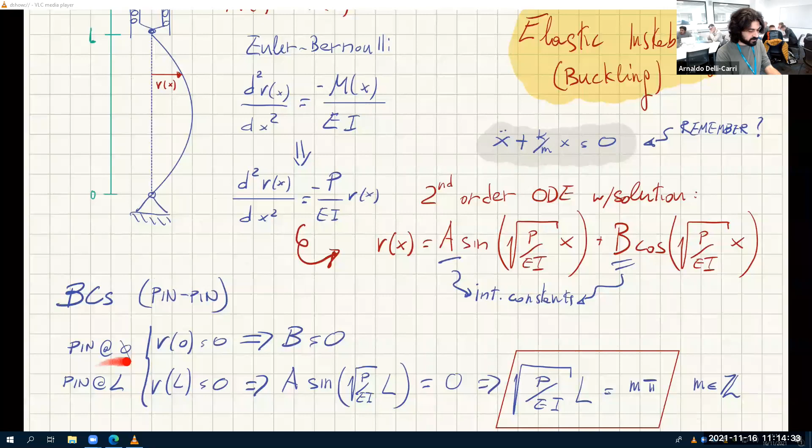Okay. So boundary conditions for this particular case, where it's pinned on this side and pinned on this side: we have v of 0. So what is v? This is v of x. I used an x-axis that goes from 0 to L. So v of 0 is 0, and v of L is 0. You agree with me? It looks like everything is 0 here and here. So v of 0 is 0 means that sine of 0, this goes away. Cosine of 0 is 1, so B equals 0. That's easy, very easy.

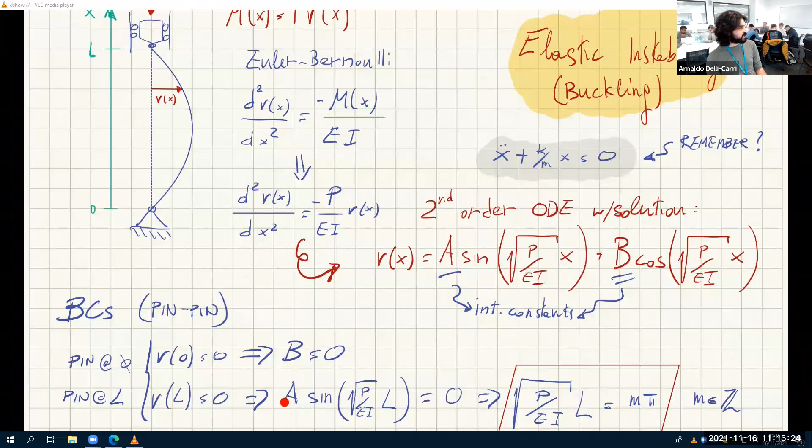And v of L is 0. Let's substitute L here. So v of L is A sine of square root of P over EI times L plus B cosine, but B was 0, so we don't care about this. So A sine of square root of P over EI times L equals 0. Now this is 0 in two cases. A is 0, but if A is 0, then we are saying that v of x is 0. So there is no buckling. So the trivial case is A equals 0.

So let's put ourselves in the non-trivial case. So this sine must be 0. When is the sine 0? The sine is 0 when the argument of the sine is m pi, where m is a relative number, which is an integer, which can be positive or negative. So 0, 1, 2, 3, 4, 5, or minus 1, minus 2, minus 3, minus 4, minus 5. Okay? So this is the solution.

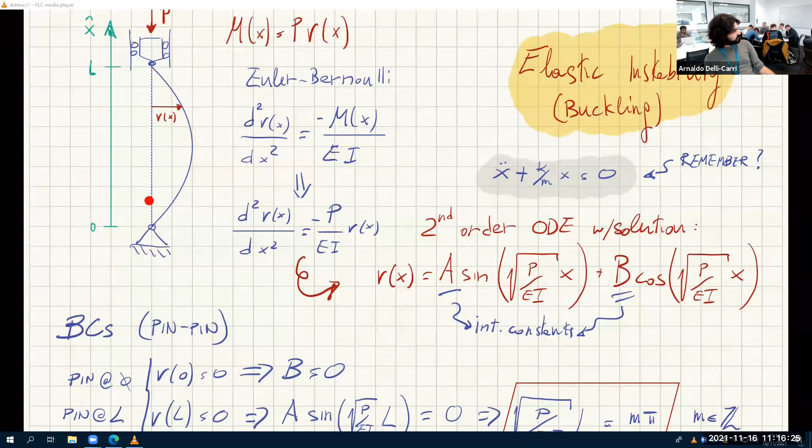And so that means that P, which is our load, is now a function of E, I, L, m, pi. In fact, I can rearrange this to find what is the load that causes this shape. Agreed? And so P is m squared pi squared EI over L squared. So you just rearrange this to find P, and this is called the critical buckling load or Euler load. That's why you have the subscript E, because it's Euler.

Everything is Euler anyway, because Euler is the Chuck Norris of mathematics, really.

So what happens if you change m? See, I told you that this works for every m. Okay, so this works for m equals 0, 1, 2, 3, 4. Well, for m equals 0, you have no buckling again. If m equals 0, you have no load, and so that doesn't make any sense. It's again a trivial thing. If you have m equals 1, you're looking at the basic mode shape. For m equals 2, you're looking at the second shape. And then you have the third shape and the fourth shape. So you have many, many shapes.

But see what happens. If m equals 1, you have just this. If m equals 2, you have 4 times what m equals 1 was. So that means that you have some loads for which you can have these shapes. Now, of course, the smallest of them is already a failure. So we don't care about the higher ones. Because if you reach the lowest one, where m equals 1, that automatically gives you the first failure mode, and that means it's already failed. So if you reach this load with m equals 1, it doesn't matter if you go higher, because it's already failed.

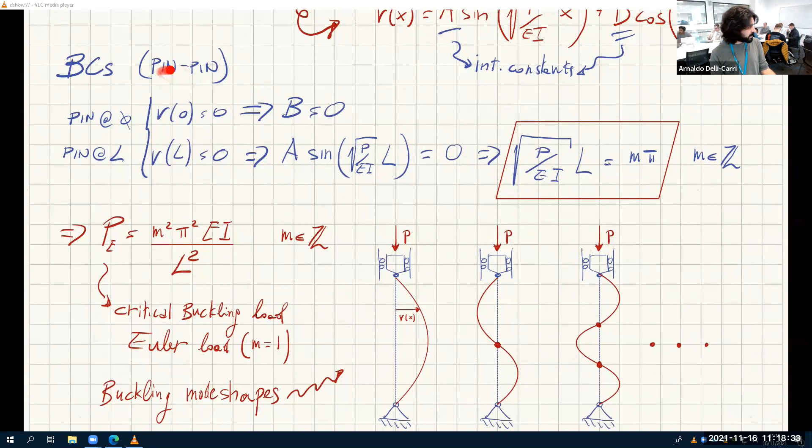Okay, now let's have a look at different boundary conditions, because this thing only works for pin-pin, which is what we did so far. So I found this one from this, which comes from this. So what happens if I have different boundary conditions? I have fix-free, pin-pin, fix-pin, or fix-fix. What happens in these cases?

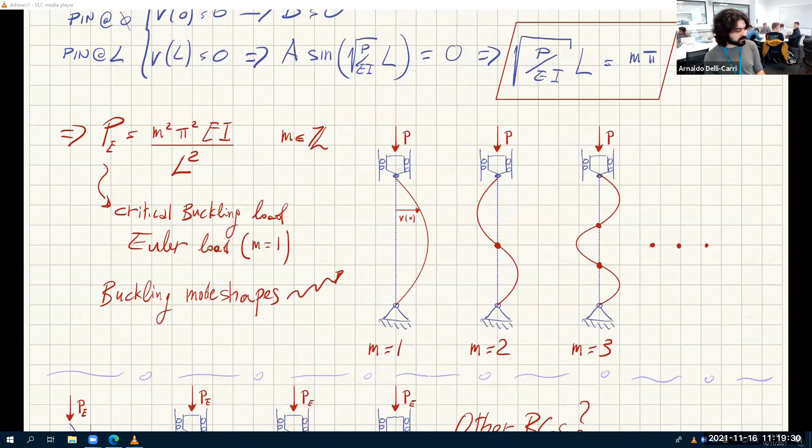Well, you have to solve the differential equation again with different boundary conditions, or since we solved it for you already, you don't have to reinvent the wheel all over again. These were already solved. And so we have added a coefficient n, as opposed to m squared. M squared is the mode shape. So we take m equals 1, because that's what we are interested in. So m disappears, basically. And you have n here.

N tells you what is the boundary condition. So for fix-free, n is 1/4. For pin-pin, n equals 1, which is exactly what we did. For fix-pin, n equals 2, and for fix-fix, n equals 4.

So as you can see, the more you are constraining this, the higher is the critical failure load. So if you want to avoid buckling, over-constrain, basically. If you over-constrain with respect to a pin-pin, if you use fix-fix, you are making yourself room for 4 times more load to be sustained. Nice.

Now, we have a problem here, because compression means it can fail in 2 ways. It can fail by crushing, that means exceeding the yielding stress, or it can fail by buckling. So how do we make sense of these competing things? How do we know? Well, ideally, you should compare the failure stress for buckling with the failure stress for yielding, and see which one is smaller every time. Is there a better way? Of course there is.

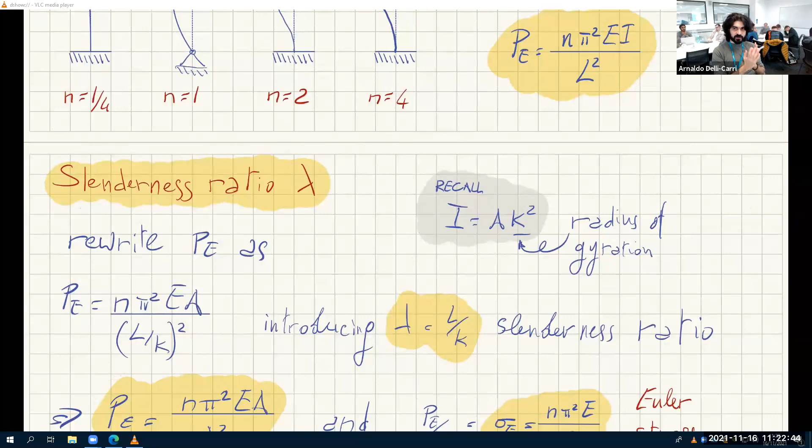So rearranging, the equation looks like this, which is easier, I believe, because this is the geometry of the beam, this is the geometry of the beam, this is the material of the beam, and this is the boundary conditions. And so what is the Euler stress that causes buckling? Well, it's just the Euler load divided by the area. So it's the same thing without A.

Okay, now that we have the compressive stress, which is P over A, and we have the Euler stress, which is this beast here, we can compare what happens for different slenderness ratios. So I plot the stress against the slenderness ratio. First of all, what are the units of the slenderness ratio? It's L over K. Okay?

L over K, what are the units of K? Well, I is meters to the power of 4. A is meter squared. So this K squared must be meter squared as well. So this is meters over meters. And so, in fact, we have no units.

And this is sigma in megapascal. And so you have the crushing line, which is the first mechanism of failure. And you know that it's P over A, and it doesn't depend on the slenderness ratio. P over A, there is no lambda. So that's constant in lambda. Agreed? And of course, it is sigma yield. If you are below sigma yield, you are safe. If you are above sigma yield, you are unsafe. So this is the crushing line.

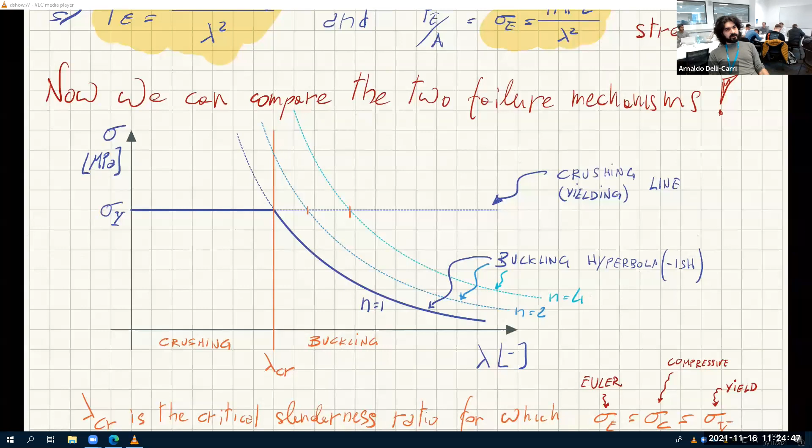Of course, the buckling stress, though, looks like a hyperbola. It's not a hyperbola, because a hyperbola would be lambda without the exponent. This is lambda squared, so it looks like a hyperbola, but it's not. And so you have the buckling hyperbolish curve that looks like this one. So if you plot this one, you get this for n equals 1. If you have n equals 2, you get this. It's the same one, but it's just being translated over. Okay.

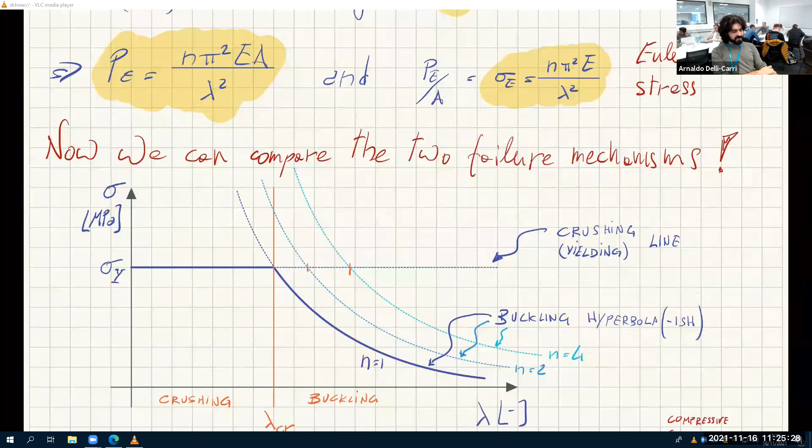And so, as you can see, they meet here. If you are in this region, crushing occurs before buckling. You crush first and then buckle. But if you are in this region, you buckle first and then crush. Okay? Because you're looking at increasing the stress in this direction. So you crush first and then buckle. And if you are here, you buckle first and then crush. All right? So we have identified two regions in this plot.

And so we have the crushing region and the buckling region, and they are separated by something that we call the critical slenderness ratio. It's critical because it separates the crushing failure mechanism from the buckling failure mechanism for the same load. If you have the same load, a more slender beam will buckle first, a less slender beam will crush first. All right? Does it make sense? Good.

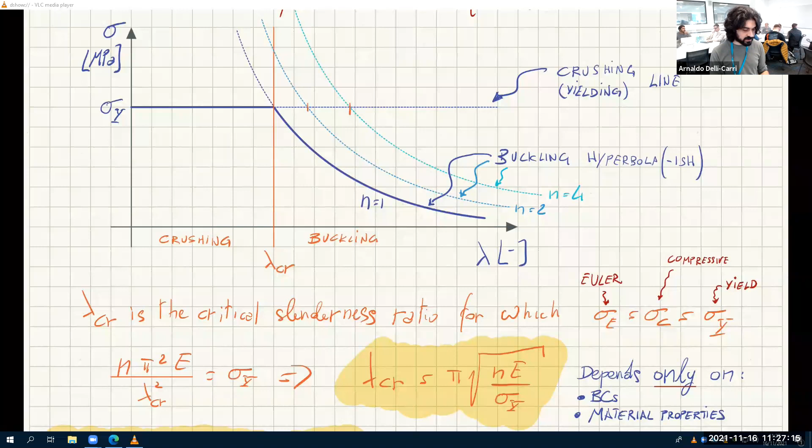Okay, so what is the lambda critical in formula? Well, it's the critical slenderness ratio for which this line and this line must be the same. This one is the Euler stress, sigma E. This one is the compressive stress, sigma C, which is also equal to sigma yield. So you can just find lambda for which this equation is true. You just rearrange to find lambda and you get this. As you can see, lambda critical depends only on the boundary conditions, this is N, and the material properties, Young's modulus and yield stress.

So the critical slenderness ratio is not a geometric property, although it looks like one. The slenderness ratio is a purely geometric property. But the critical one depends only on the boundary conditions and the material. And that's a bit of magic, which you can do with mathematics. That means that once you know the material and how your beam is constrained, you can already tell, based on your calculated slenderness ratio from your geometry: if it's smaller than lambda critical, it will fail in crushing. If it's larger than lambda critical, it will fail in buckling.

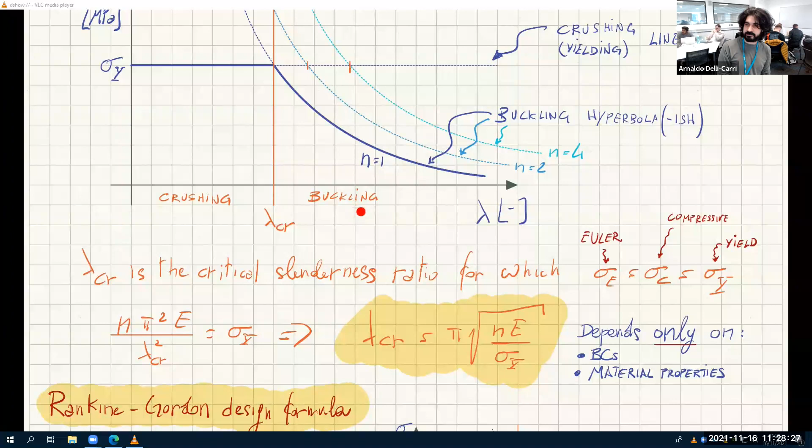The last thing I want to discuss for this revision is, let's look at this. This is a discontinuous curve. Do you agree? Because the derivative on the left-hand side of this point is different from the derivative on the right-hand side. So this is a discontinuous function. And we don't like them because discontinuous functions must be treated in segments. Segment 1, segment 2. So they are continuous in a piecewise way. Piecewise continuous functions, which are discontinuous in nature.

So can we find a continuous function like this? Yeah, of course. It's an approximation, but it works very nicely because it's a continuous function. So we don't have to study it in segments. So is there a function like this? Yes, this one. 1 over sigma failure, which is this red curve, equals 1 over sigma yield plus 1 over sigma E. This is called the Rankine-Gordon design formula.

It's an empirical formula. It's more conservative because it always lies below this line. So it never goes up. So the stress is always more conservative than it should be, which is a good thing for engineers. Okay. For engineers, always go conservative unless you're voting. Okay?

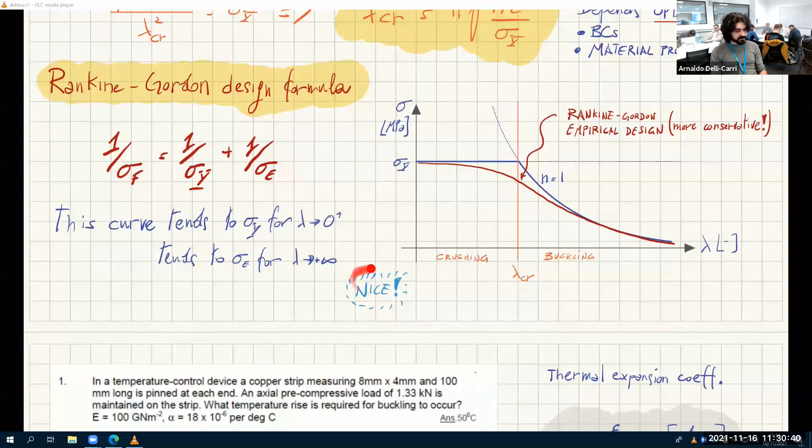All right, so we can now start. First of all, any questions? Any questions on this? It's very important.

I will stop recording for a second. Not stop, I want to pause the recording for a second. Okay, it's very scary. Okay, we are back again.

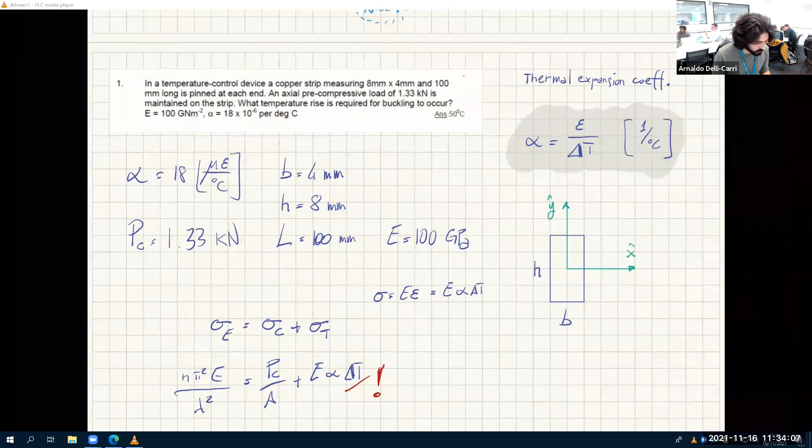So let's solve this one. What's this? Let's solve question 1. Yes. Do you need to continue your recording or are you already recording? Yes, I am recording already. Okay. I also got this very loud announcement in this room.

Okay, so in a temperature control device, a copper strip measuring 8 × 4 millimeters and 100 millimeters long is pinned at each end. An axial pre-compressive load of 1.33 kilonewtons is maintained on the strip. What temperature rise is required for buckling to occur?

Now we are given two material properties. One is the Young's modulus, 100 gigapascals, and one is this alpha. What is this alpha? It says here on top, it's the thermal expansion coefficient. And if you don't know what that is, it has units of something per degree. That something has no units, so it's no units per degree because we're talking about microstrains.

We're talking about strains. So alpha is the strain divided by the delta temperature. It's a material property. Every material has its own thermal expansion coefficient, and it refers to normal strain only. Why? Because if you immerse an object at a certain temperature, it will expand. It will maintain its own shape. It will just expand, get larger.

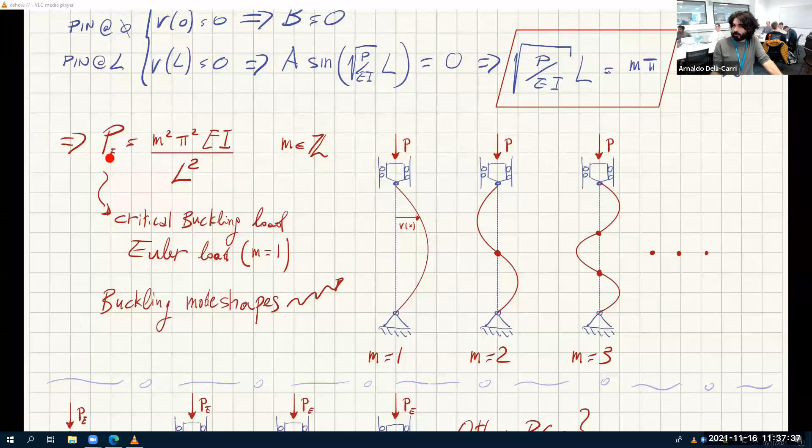And in fact, you reminded me that we didn't talk about one very important thing: when you have I, which I are you using? Since we want the smallest load, you need to use the smallest I. That means the beam will buckle around the smallest I. So in this case, it will not buckle around X, it will buckle around Y. Agreed? Well, it will buckle around X eventually, but it has already failed around Y, so it doesn't matter.

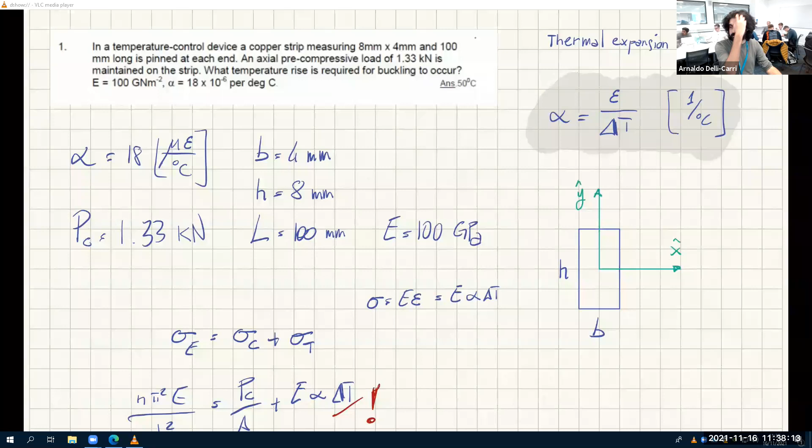Okay, so these are all the geometrical properties. These are the load properties, and these are material properties, alpha and E. Now, this strip looks like this. It's mounted in this way in this temperature controlling device. And you know that there is a load applied already, a compressive load of 1.33 kilonewtons.

What's required is how much more stress it can take before buckling. And that stress is not due to further load, it's due to temperature only. So the Euler buckling load is a combination of compressive stress and temperature stress.

Okay, so this stress is due to the compression, and this stress is due to the temperature. Now let's have a look. Euler load is this. Okay, compressive stress is compressive load over area.

And the temperature one is, well, remember that sigma is E times epsilon. Epsilon is alpha delta T, and so sigma T is E alpha delta T. Okay, very easy. Although you need to stitch all these pieces of information carefully together in order to understand what's going on.

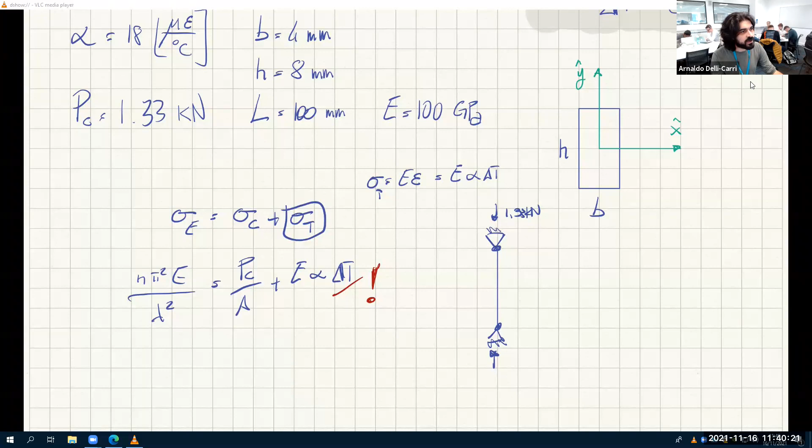Okay, now that we have this, let's have a look at what we know and what we don't know. N is the condition. What is N for this boundary condition? It's pinned at both sides, so it's 1. Let me check the chat... yes, I see Marius, thank you. Yes, this is 1. So N equals 1 in this case because it's pin, pin, pin.

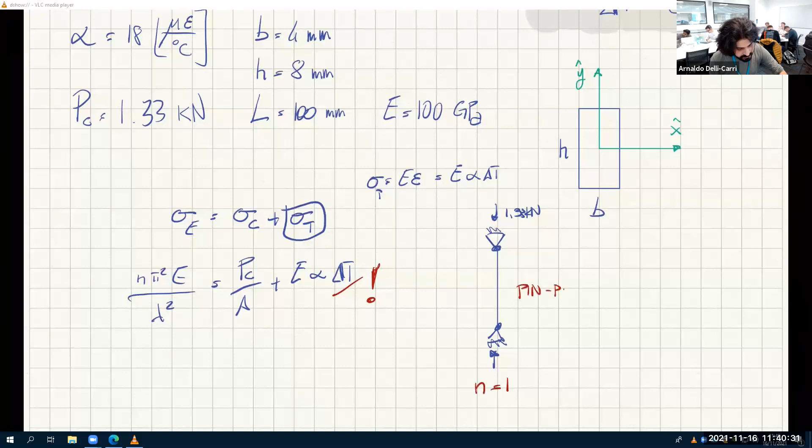So N is given from the boundary condition. Pi is pi. E is given. Lambda, is it given? Well, we have L and we have the cross-sectional information. So remember, lambda is L over K, and K is square root of I over A.

So we know I, we know A, we know L, so we can find it. So I can also say that lambda is just L over square root of I over A. Or even better, lambda squared is L squared A divided by I. You agree?

So L is given, A is given. Well, A we can find and I we can find. So here we know everything. PC we know, 1.33. The area we know. Young's modulus we know. Thermal expansion coefficient we know. The only unknown is delta T. That's it. So how much temperature gradient do you need in order to activate this strip?

Now this is a temperature controlling device, but this is also how some thermal switches work. So if you know that you are in a kettle, like in a kettle, yes, also, sure. So a thermal switch works like this.

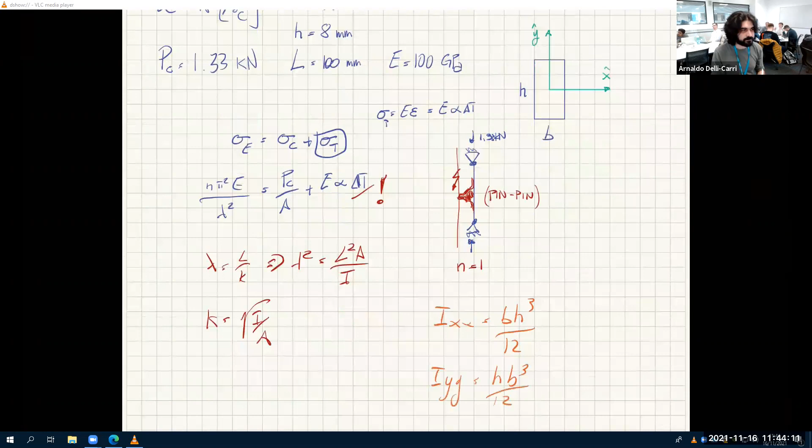Okay, so in this case, IXX, let's check which I we want to use. So IXX is BH cubed over 12, and IYY is HB cubed over 12. Now in this case, you do agree with me that IYY is the one that we should use. Agreed? So in this case, instead of I, I will always say IYY. Every time I find I, I need IYY, which is the smallest of the two, since IYY is smaller than IXX, so this is the one that we want.

Okay, so I will not do the calculations here because boring. Okay, so you do the calculations. I think this exercise is very cool.

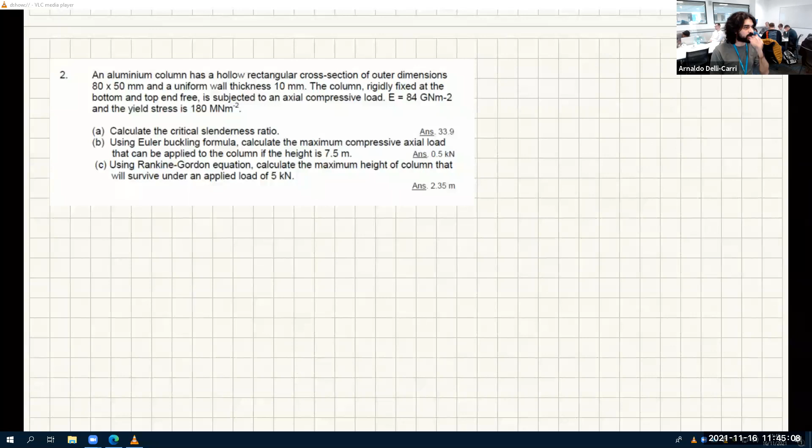Now let's do this other one. An aluminium column has a hollow rectangular cross-section of outer dimensions 80 by 50. So let's draw this one. It's a hollow rectangular, so 80 by 50, something like this.

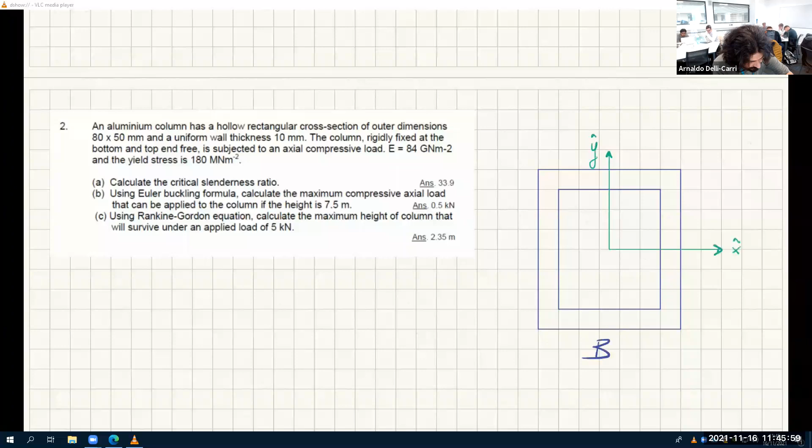Okay. And so let's say that this is the y-axis, and this is the x-axis. Our outer dimensions are these, so let's call this capital B and capital H. And the uniform wall thickness of 10 millimeters, so let's call this one T.

The column is rigidly fixed at the bottom and top end free... the column rigidly fixed at the bottom and top end free is subjected to an axial compressive load. So we have a condition that looks like this.

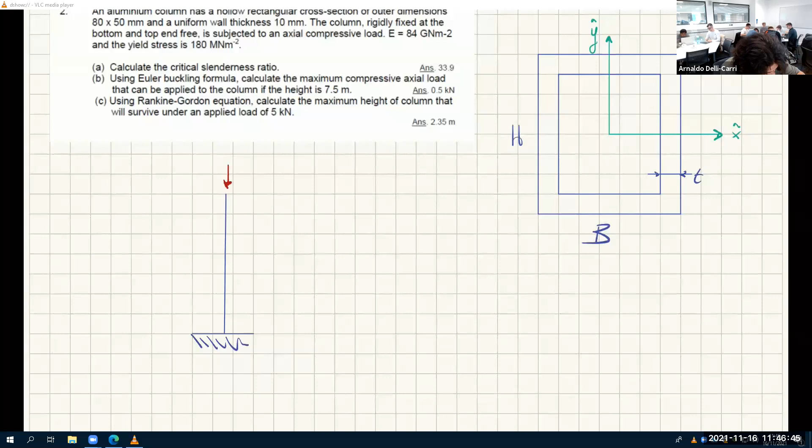It doesn't say how much, but we know that the material properties are 84 gigapascal for Young's modulus and yield stress of 180 megapascals.

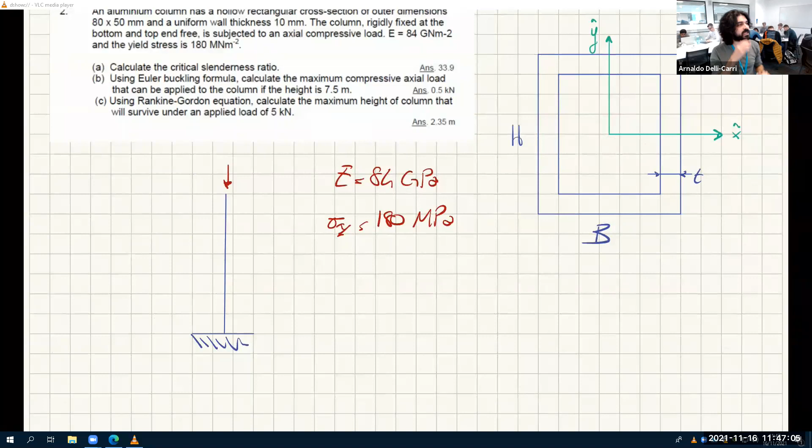Calculate the critical slenderness ratio. First of all, what is N for this? It's 1/4. Come on guys, 4 is for fix, this is fix-free, so this is the least constrained one. This is very susceptible to buckling. So N is 1/4 for the fix-free boundary condition.

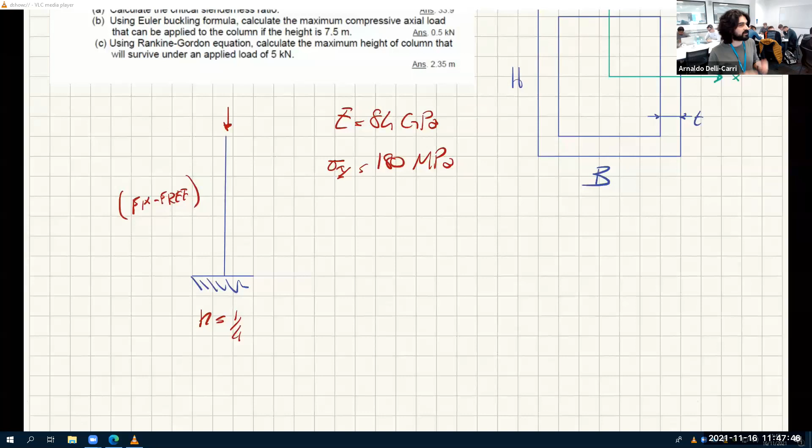And what is the critical slenderness ratio? Do we need anything? We don't need anything. We need to know the material properties, N, and the boundary conditions. Let's take this one here. That's what we need.

There you go. Bam. How much is this? I believe this one is 33.9. Just make sure that you use the correct units. E is in gigapascal, so you want to be using megapascal. So it's N, 1/4, times 84,000 divided by 180, under square root, times pi. This should give you 33.9.

What are the units of this? No units, because it's megapascal over megapascal. That's it.

Using the Euler buckling formula, calculate the maximum compressive axial load that can be applied to the column if the height of the column is 7.5 meters. Now the height of the column is the length of the beam, basically.

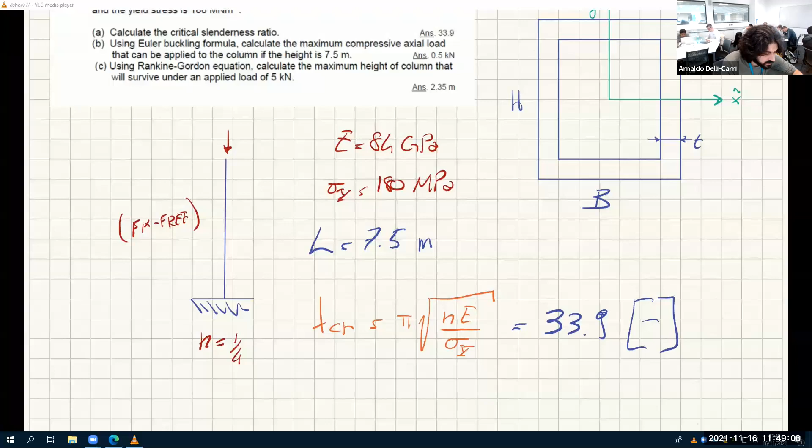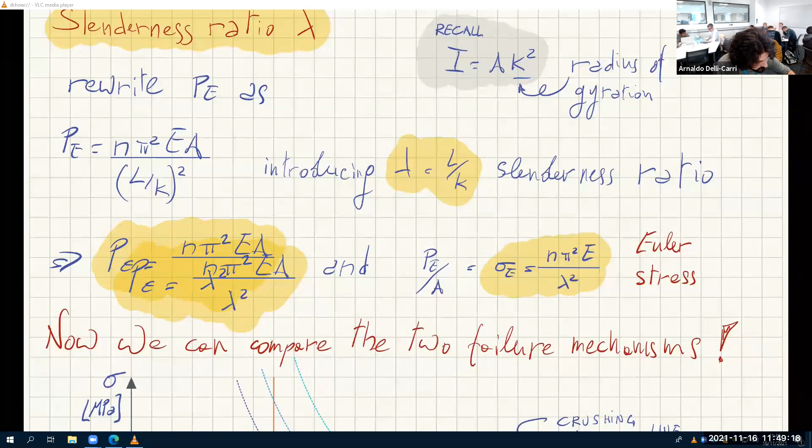I'll just copy and paste the formula for the critical load, so this is Euler load. This is part A. This is part B. So we first have to calculate the slenderness ratio. Now the critical one is this, and now we calculate the actual one to see if it's greater or smaller than the critical one. If it's greater, it will fail in buckling. If it's smaller, it will fail in crushing.

So lambda equals L over K. L is given and K is not given, so let's find K first. K is the square root of I over A. Therefore let's find I. Which one is the smallest I in this case? Again it looks like it's around Y, so it's I-Y-Y, the smallest one.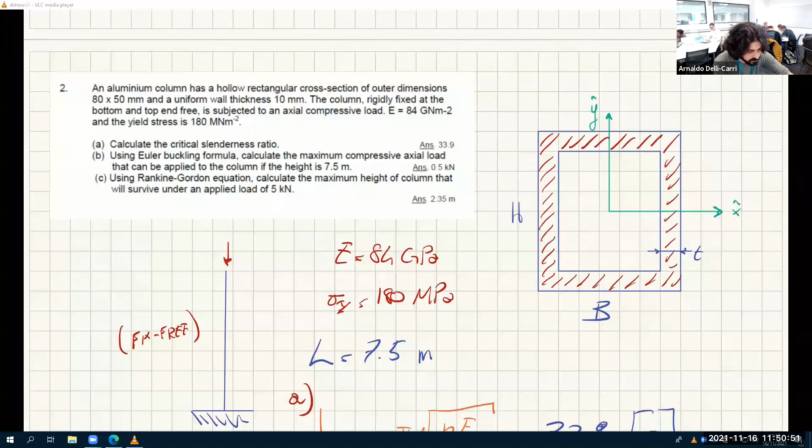How much is that? Remember, the area that we want is this. And so we want I-YY is HB cubed divided by 12 minus, so it's the larger square minus the smaller square.

So the larger square is HB cubed divided by 12, where B is 50, and H is 80, and T is 10. So you know that the small b here, so small b and small h. Small b is capital B minus 2t, and small h is capital H minus 2t.

So this minus small b, small h, small b cubed divided by 12. Agreed? And so can you do this calculation for me, please? Where this is just HB cubed divided by 12 minus H minus 2t times B minus 2t cubed divided by 12.

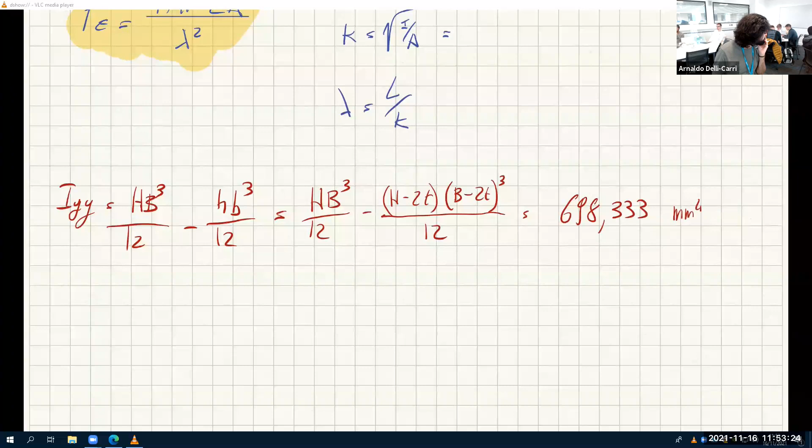Let me check the chat. Asia says 698,333. So let's say 698,333.3. Well, it's already millimeters to the power of 4, so let's take it like this, approximately just 698,333.

How do you go from HB over 12 minus HB over 12? Because I'm looking at these. So this small b is capital B minus t minus t. And also small h is capital H minus t minus t.

Okay, we have this, and can you tell me how much is K then? So the area of this is also, so the area is HB, sorry, capital B times H minus small b times small h. So can you tell me how much is the area in millimeters squared?

Come on, who's faster? Guys, this is easier than the last one. 2200. 2200. Thank you. Millimeter squared.

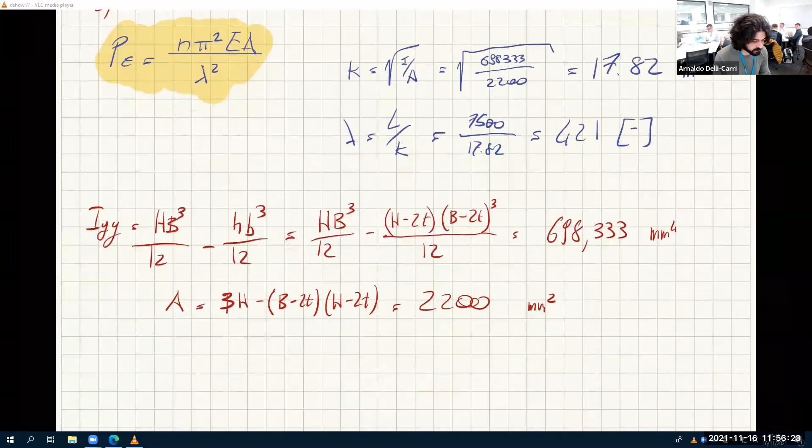How much is P? It should be 0.5 kilonewtons, or 500 newtons. As you can see, only 500 newtons, which is about 50 kilograms. So P is n pi squared EA over lambda squared, which is 500 newtons.

And why is it only 500 newtons? Because the slenderness ratio is unbelievably high. It's too slender. It's 421 times longer than it is thick. That's the idea. So this might be spaghetti, a 7.5 meter long spaghetti.

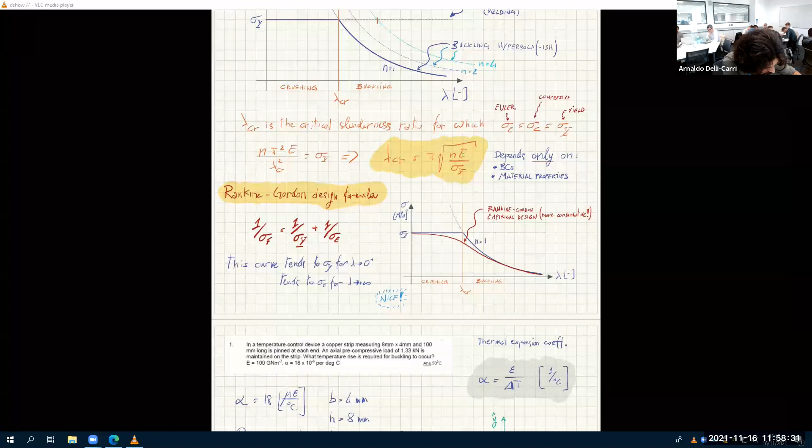Then we have sigma F, which is the failure stress, and an applied load of 5 kilonewton. So sigma failure equals 1 over P over A. This is sigma yield, and this is 1 over sigma E. Sigma E, let me find it here, is very easy, it's this one.

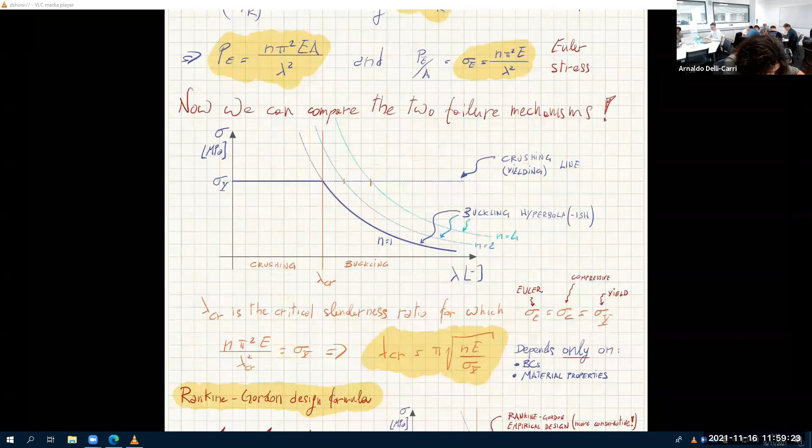So this is n pi squared E divided by L divided by K squared. The only unknown in this equation, as you can see, is L, because this is the new load, 5,000 newtons. This is the area that we know, and this we know too. It's the same cross section, so K is also the same.

What's the new length so that it doesn't fail? So that we are on the brink of failure, really. Under that length it will not fail, above that length it will fail. Any questions on this? As you can see, it's very easy.

How is P 500? Actually, for lambda I use this one. I used 421. And remember, you have to use the correct units. So if you use E in gigapascal, A in millimeter squared, you should get a result in kilonewtons, so you should get 0.5.

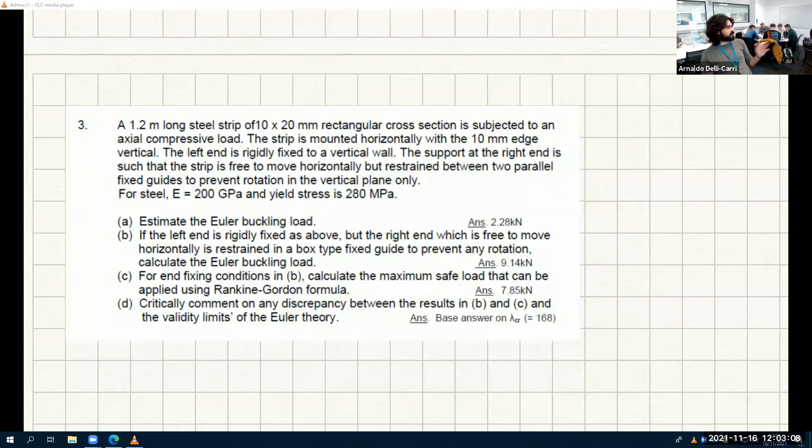So estimate the Euler buckling load. The Euler buckling load is the smallest load for which it fails. Depending on which plane you look at, XX or YY, with different boundary conditions, you take the smallest load, and that's the Euler buckling load.

Then it says, if we release one of the constraints, what's the new Euler buckling load? Of course it becomes higher. Oh no, wait, we are over-constraining this, so we are not releasing the constraint, we are adding a new constraint. Of course the Euler buckling load goes higher, and it's 4 times as high, as you can see. Very easy.

For the end fixing condition in B, what's the maximum safe load that can be applied using the Rankine-Gordon formula? So again, this is exactly the same thing, you just have a different unknown. And now critically comment on any discrepancy between the results in B and C and the validity limits of the Euler theory. Okay, so all this information you find in the lecture slides.

Any questions? No? I think this exam question is quite fun as well. It's not too hard. It requires some initial thinking about understanding the boundary conditions and about understanding what is the smallest second moment of area that you have to use. It might be that XX and YY are on different boundary conditions, so keep your eyes out for this. And that's it. Everything else is just literally very easy.

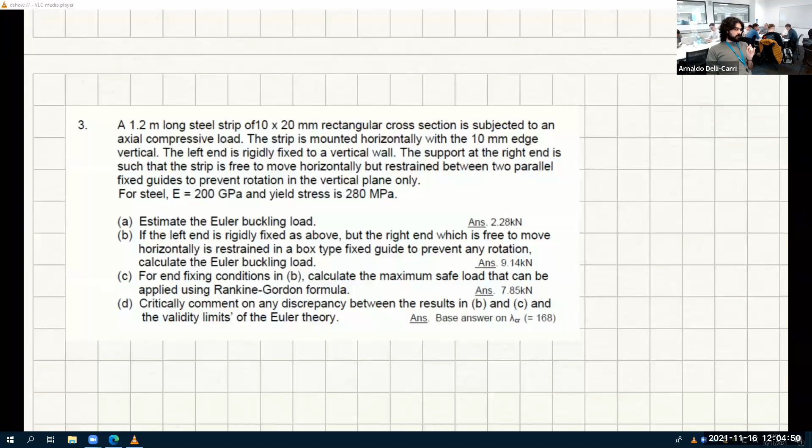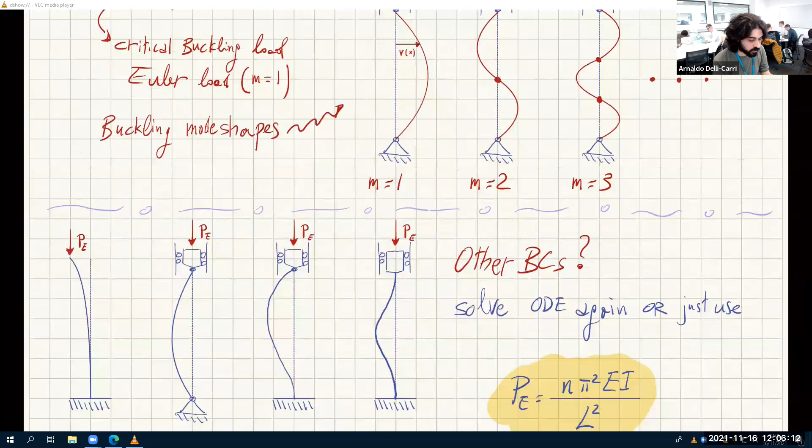Now I'm not sure why you got a different answer, or probably I didn't do this calculation, so probably this is wrong. Guys, can you please recheck this calculation for me? Because this is seemingly not correct. If we get all of these, this is not 0.5 newtons, I'm so sorry, 0.5 kilonewtons. But apparently the solutions got the same answer as here is getting. So I don't know. Okay, yeah, I got the 2572.

Okay, so you also got 2572.6. So let's use yours. So 2572.6, which is the same as the solutions apparently, but not the same as this answer here. Who knows?

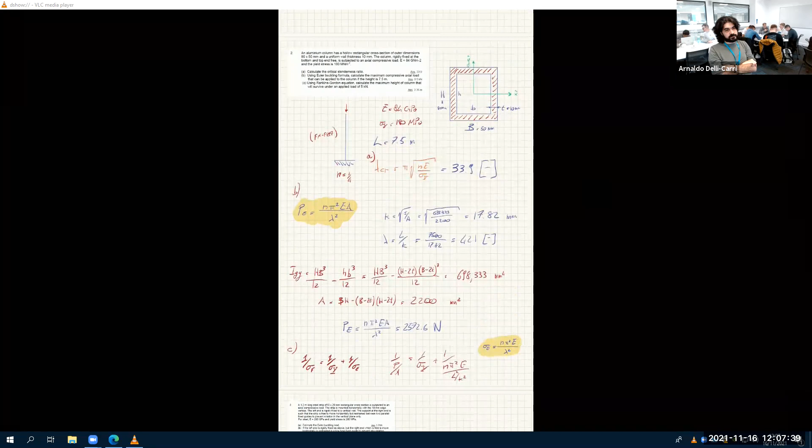So one very overlooked source of error for strain gauges is how you glue them. If you glue them slightly off axis, you are measuring a different strain. So it depends on the angle you're gluing it on. So you must be spot on to measure this line of stress rather than this. Okay.

Also, did you write about the Wheatstone bridge? No, why would I write about it? Because it's very important, because that's how you are measuring the strain. So you're not measuring the strain, you're measuring a resistance. Yeah. So how do you measure resistance? With a Wheatstone bridge? Length. No, it's not just length. That's how you calculate resistance. You are measuring resistance. It's a different thing.

If you glue it in this direction, it will measure the strain in this direction. So if you glue it a bit off axis like this, you're not measuring this, you're measuring this. And so you're measuring a different thing than you want. So there's a source of error.

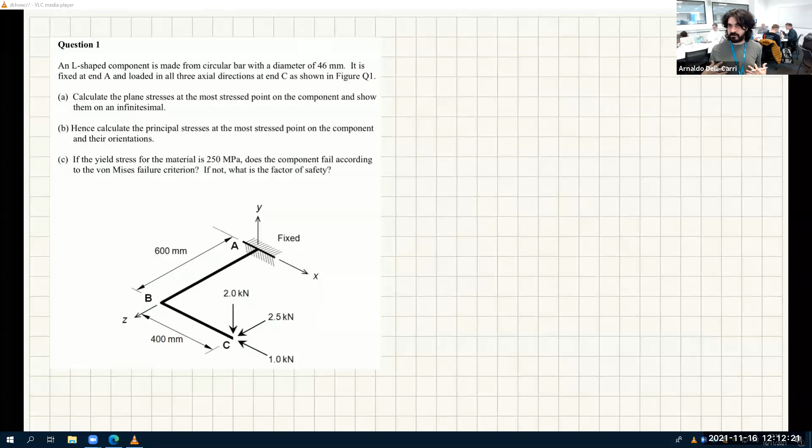Okay, I think it's time we resume. It's 5 minutes already. All right, so do you want me to solve anything in particular? First, this is revision, so it's kind of open-ended, open questions. So do you want me to solve anything in particular, or do you want to go? Yes. Yes.

The question, can you do it the IJK way? What is the IJK way? Cross product. Oh, okay, sure. Yeah, we can do that. Yeah, that's how you should do it. It's just vector products. So do you know about IJK? I think you do, because you're asking me about it. So you have I, J, K. You know about this, do you?

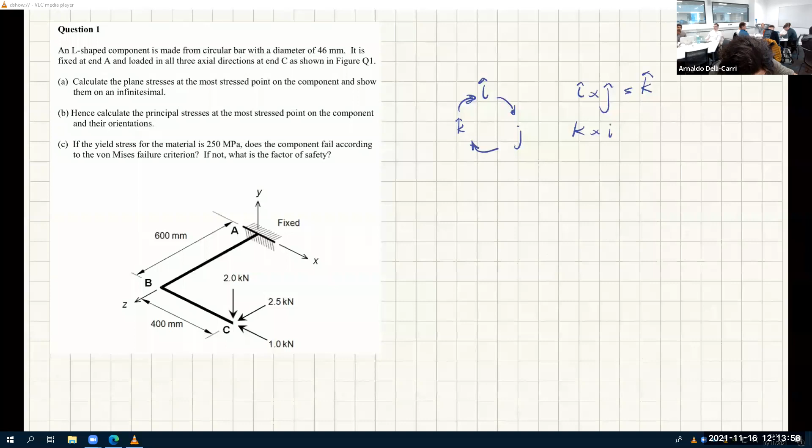And so if you have I cross J, you get K. I cross J gives you K. K cross I gives you J. And J cross K gives you I. Now, of course, cross product also means that if you invert these, you have the opposite of it. So K times J gives minus I, I times K gives minus J, and J times I gives minus K.

So we also have that the moment is, remember, force times perpendicular distance, but the vector moment is also the distance cross product with the force. Okay, good. How does this compare to force times perpendicular distance? Do you know about that? So let's say this is O, the pole of reduction of the moment. Let's say the moment about O. And so this force is applied, say, here at point P, and it's in this direction.

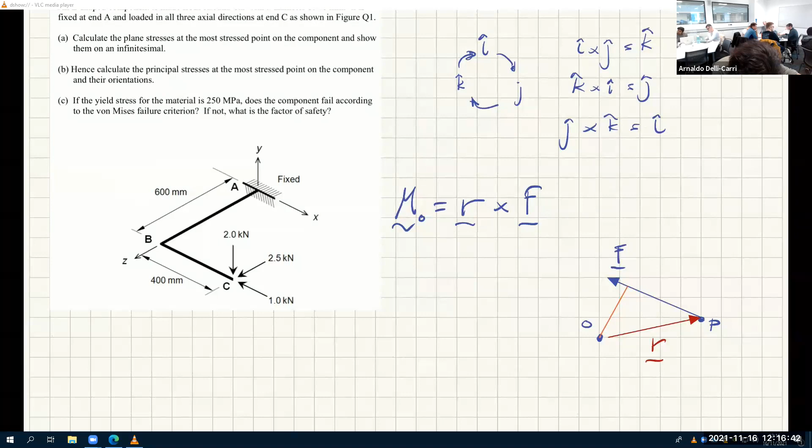Okay. Now, if I do this, this is my force, and this is my R. Now, as you can see, it doesn't look like we are doing force times perpendicular distance here, because this is not perpendicular. So the perpendicular distance is this. You agree? Come on. There you go.

And so let's check what this means. Remember, the magnitude of this vector, M, is the magnitude of the first vector times the magnitude of the second vector times the sine between the two. Agreed? And now, if you look at this, you tell me what is r sine theta. This is the hypotenuse of this triangle. Agreed? And so r sine theta is this edge, and this edge is the perpendicular distance. There you go.

So I can say that MO is F times D. So this is the other way you do the moment. So either moment is force times perpendicular distance, or the vector product of the distance from the pole of reduction to the point of application of the force, R, times the vector force itself. Very good.

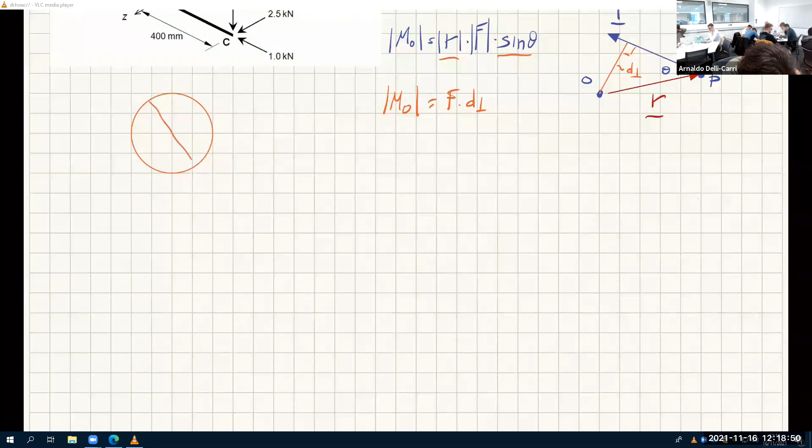And this is the center. It's fixed at end A and loaded in all three axial directions at end C, as shown in figure Q1. Calculate the plane stress at the most stressed point on the component and show them on an infinitesimal. Calculate the principal stresses. If the yield stress is this much, does the component fail according to the von Mises failure criterion? And if not, what is the factor of safety?

Very good. So it just comprises everything that we did in that week, basically. So how do you do this? Remember, you always first have to find the bending moment diagram. And I believe that it's very complicated here because you have three forces. But you also know that the most stressed section will be here, because that's where the fixed support is.

And so you can just take all the force components. These are all the internal loads. And then you have a force along X, a force along Y, and a force along Z, a moment around X, a moment around Y, and a moment around Z. Some of these will be normal force, some of these will be shear forces, some of these will be bending moments, one of these will be twisting moment. We just have to check the axis.

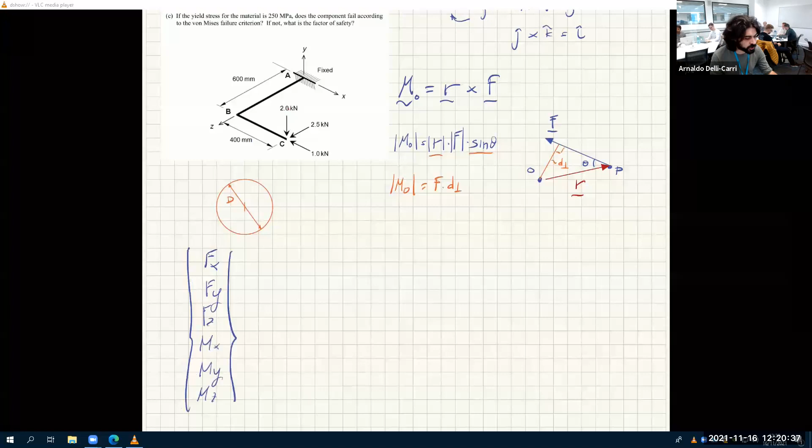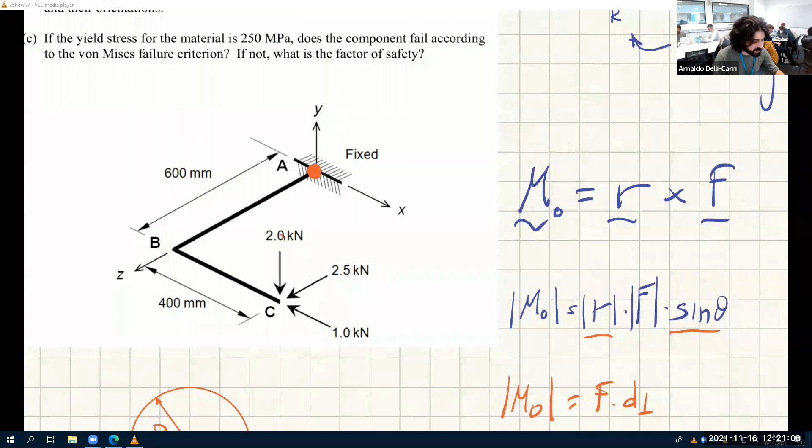So now the section that we want is this one. And so which axis is normal to this section? Yes, Z. Okay, so the axis that is normal to that section is Z. So if I draw the axis here, I see that the x-axis goes in this direction, and the y-axis goes in this direction. Very good.

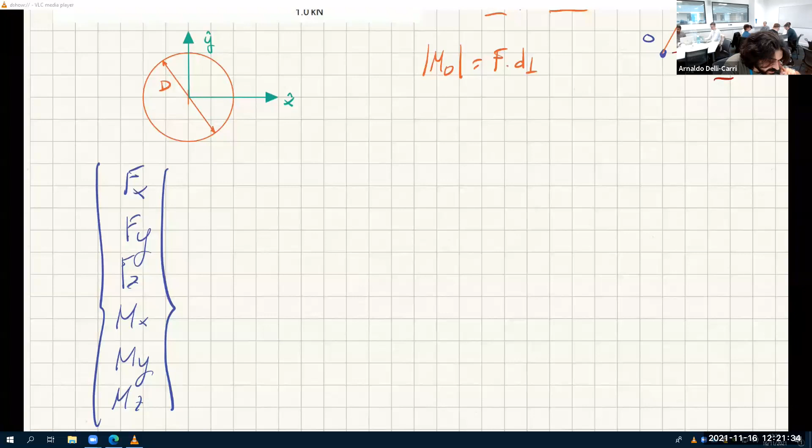Now, question. Let's find the moment. Now, the moment of these three forces about this point, let's call this point A, so M of A. I want to find the sum of moments about A of these forces. Now, let's do this in the IJK way. So this is R1 times F1 plus R2 times F2 plus R3 times F3. You agree with me? Okay.

So how much is R1? Well, you should agree with me that R1, R2, and R3 are exactly the same. R is this. This vector here is R, which is the distance from the point of application of the force, and in this case all three forces are applied at the same point. So R1, R2, R3 are just R. R equals R1 equals R2 equals R3. And then I'll say that this is force 1, this is force 2, and this is force 3. They are all applied at the same point, but they have different directions. So how much is R in vector form?

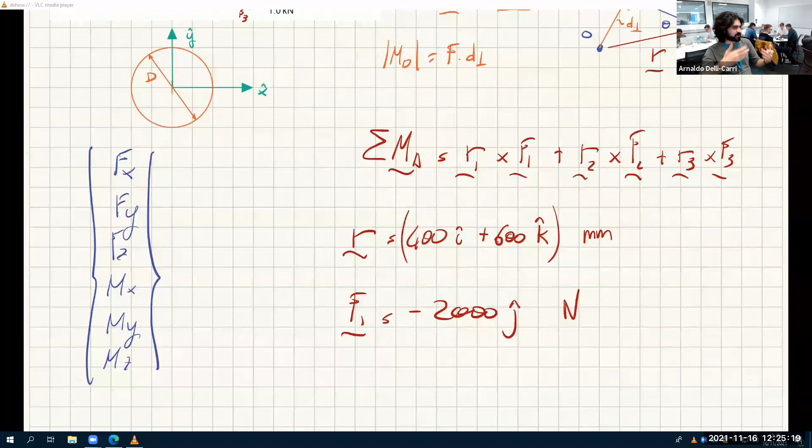Yes, J is for the Y. I, J, K, X, Y, Z. Yes, so you put still the wrong thing, because the Y is 0. The 600. Oh, you're right. For R, yes. So 600 is Z. Thank you. So this is K. So we have no J in this case because it is on the plane XZ. So F1 is minus 2000j.

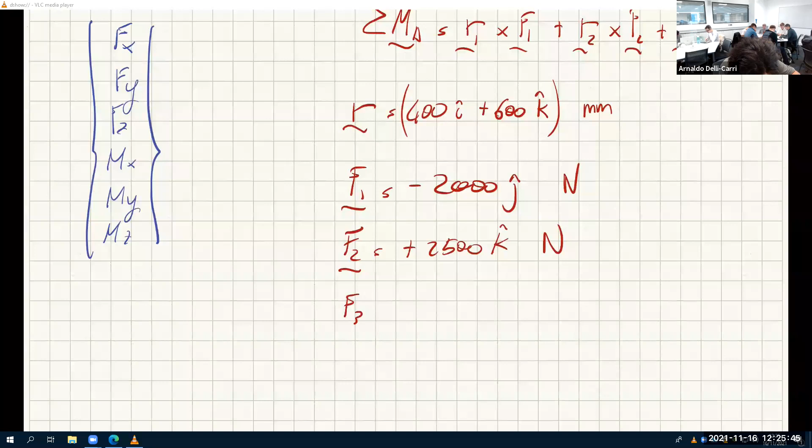F2 is plus 2500k newtons. F3 is minus 1000i newtons. Do you agree with me? Now that we have all this information, we can solve this one. So let's do this one by one. So this is 400i plus 600k cross product minus 2000j, plus this one again, and this one again.

This one is minus 2000 J, this one is plus 2500 K, and this is minus 1000 I. And now how you do this, it's just multiplication. Remember these, and you add usual multiplication things. So you have 400 times 2000, it's 800,000. Is it 800,000? So minus 800,000.

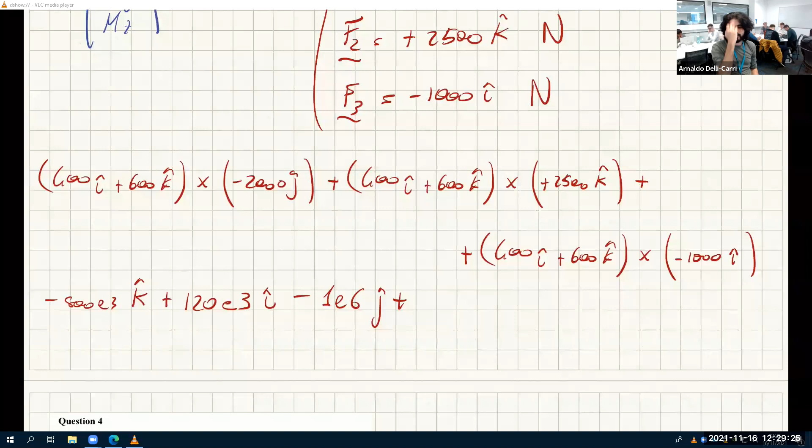Plus 600 K times K. What happens if you have K times K? Nothing. I mean 0. Why? Because K and K are parallel to each other. So the angle between the two is 0. So the sine of 0 is 0. Done. So K and K, you have this nice 0 here. I'll write it down to remind you that nothing happened between this and this.

Plus, this is also 0 because it's I and I. And then you have K and I, plus. K and I is J. Yes, K and I is J. So 600 is minus, so this is minus 600,000 J. So 1 million minus 600,000, sorry, minus 1 point, this is 1.6e6.

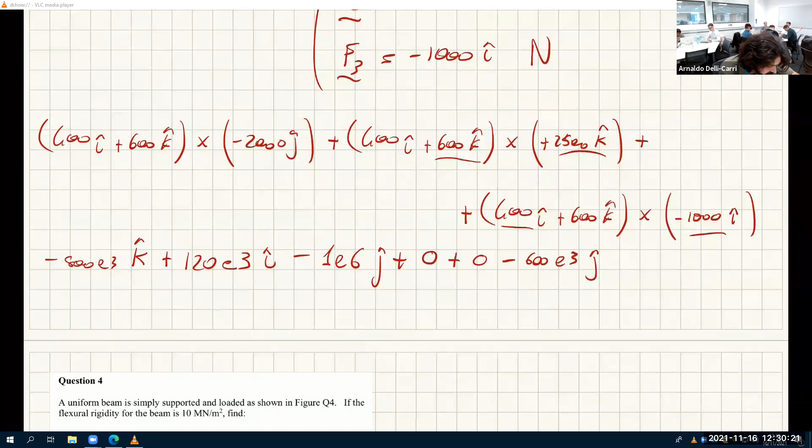Okay, so finally, M of A, the sum of moments on A, the vector description of this is 120,000 I minus 1,600,000 J, and minus 800,000 K. I don't know if this is easier or harder, but it's automatic. So the good thing about this is that you can program a computer to do this, and it's very easy. And if you don't want to make mistakes, this is also a good way to go.

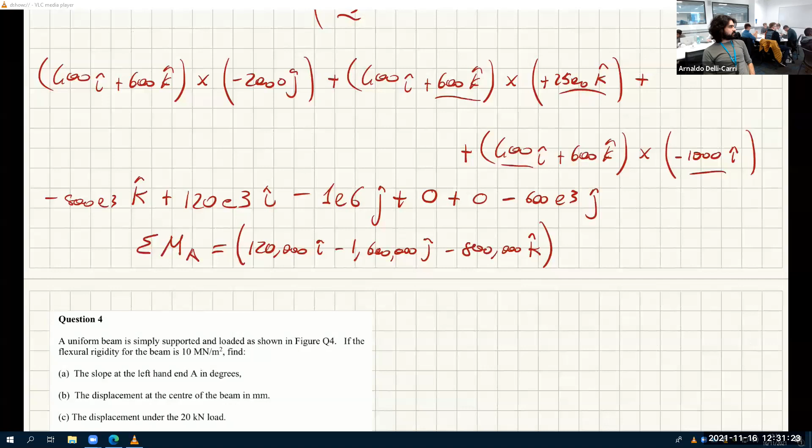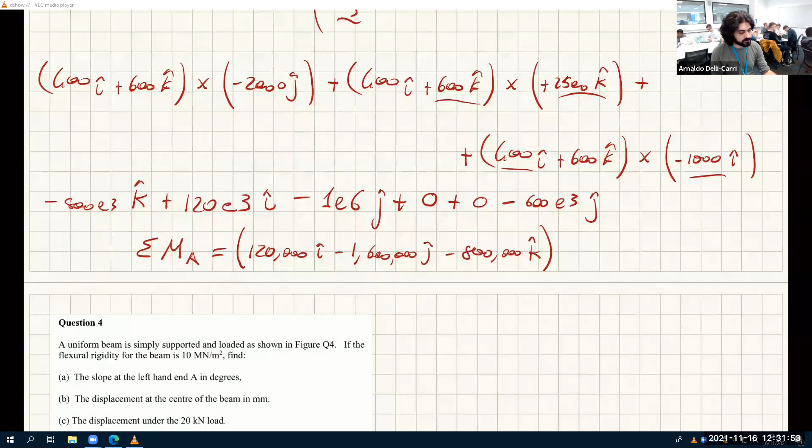But how do you use this now? Well, Mx is this one, My is this one, and Mz is this one. IJK, very easy. So you have one description for all. None? Okay, good. And now let's add the page here.

Now that we have found sum of moments, let me do I, J, and K, and they are here. So you have K, J, and I. All right, and it's exactly the same thing that you can do with the forces, but the forces are very easy because Fx is this, Fy is this, and Fz is this.

So let's go back to our description. So Fx is minus 1,000. Fy is minus 2,000, and Fz is 2,500. And the moments are 120,000.

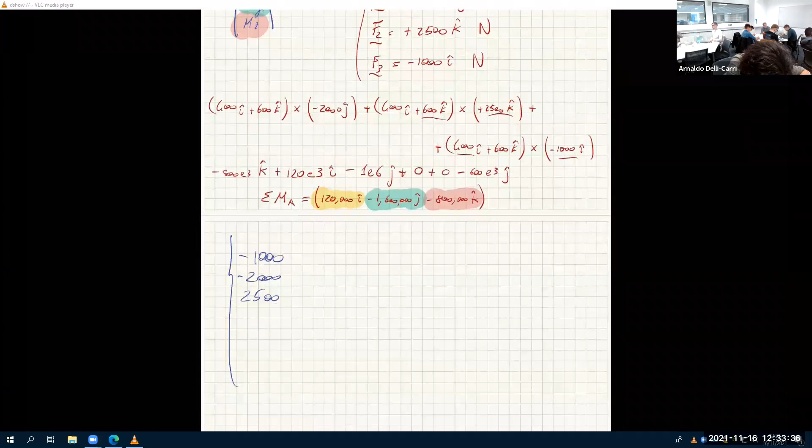Remember, these units here are Newton millimeters. That's why they look huge. They are huge because it's Newton millimeters. If you use Newton meters, they are more reasonable numbers. Minus 1,600,000. And minus 800,000.

Now remember, this one was Fx, Fy, Fz, Mx, My, Mz. But some of them are normal, some of them are shear, some of them are bending, some of them are twisting. How do we know? Look at the section first. The section is this. So Z is normal to the section. So Z is the direction of the normal force. So that means X and Y are shear forces.

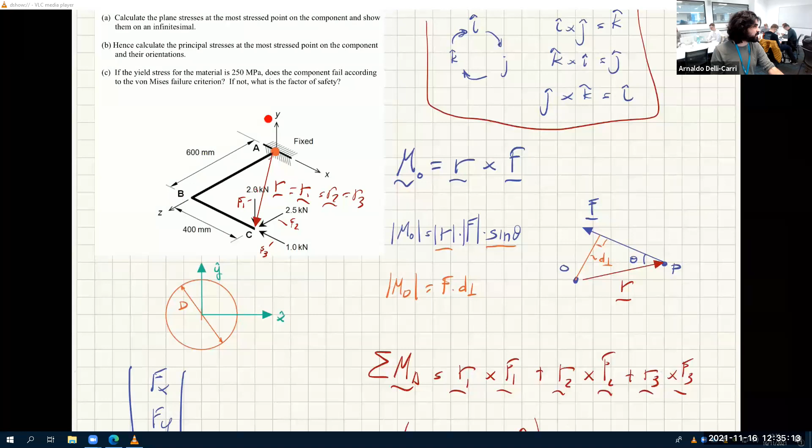If Z is the normal force, around Z is always the twisting moment. And so around X and Y, we have the bending moments. So this one is N. These are shear, Vx and Vy. Around the shear, we have the bending, Mx and My. And so that means that this one is T.

And now remember the stresses. So you can just rewrite everything in terms of stresses now. The normal stress sigma Z is in the normal direction. So sigma Z is N divided by A. Which tau is this? Tau what?

Well, for sure it's tau X. So sorry, it's tau Z, because we are on the Z face. The direction we still don't know. Well, direction Y, because it's Vy. And why did I write X? I said Z, and I wrote X, ZY. Very good. And this is Vy times Qy divided by Iy t. Remember this?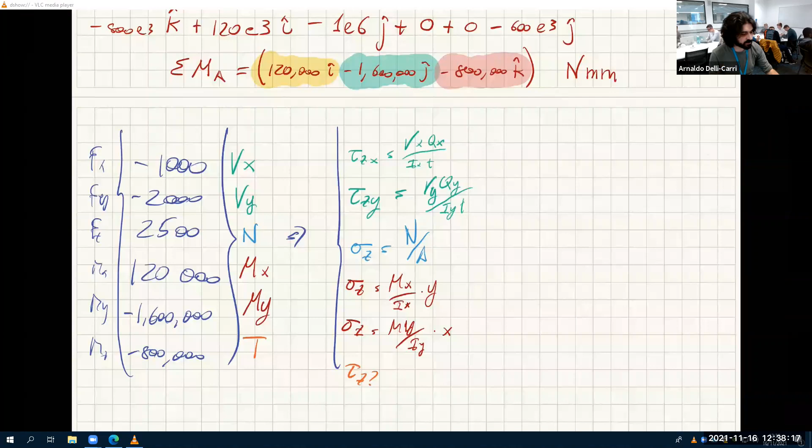We only know that it's tau Z and something, because it depends on which point we are looking at. If we're looking at the top point, then it's tau ZY. If we are looking at the side point, it's tau ZX. Sorry, it's the other way around. If you're looking at the top point, it's tau ZX. If you're looking at the side point, it's tau ZY. Remember this? If this is the twisting torque, T, then this is tau ZX, and this one is tau ZY. Okay?

Yes? When you write tau ZX, how do you know it's tau ZX? How do I know if I use Y or X? No, I mean for the shear, how do you know to put it like tau ZX, tau ZY? Because the normal is always Z, so the first letter is always Z. This is tau X because it's the shear force in direction X. This is tau Y because it's the shear force in direction Y. Why is the first letter always Z? It's always Z because we are looking at this face, which is in the XY plane, so the normal is Z. Okay?

Yes. Are the moments in newton millimeters? Yes, apart from the forces, which are in newtons. So tau Z, we don't know because it depends on the point, is T divided by J times R. Now, A, Ix, Iy, and J are all section properties that we can calculate because we know everything about the section. So remember that A is pi d squared divided by 4. Ix equals Iy for this case, which is pi d to the power of 4 divided by 64. And J, in this case, is pi d to the power of 4 divided by 32. Okay, so these are all the information that you need.

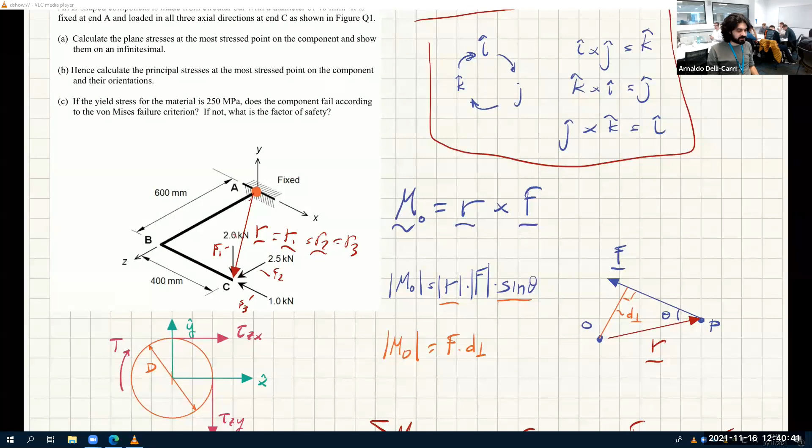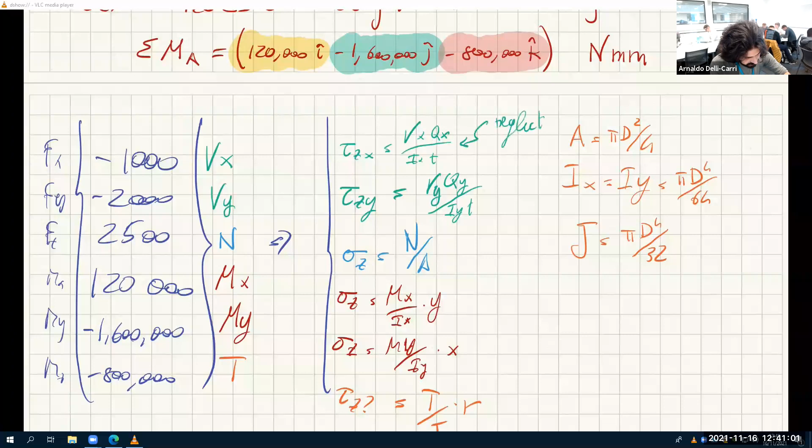We can also neglect the shear stress. Why? Because it looks a very slender beam to me. It's 600 millimeters long and it's 40 millimeters thick. So it's 10 times as long as it is thick, more or less. And so I'd say we can neglect these shear stresses. This one, neglect, and this one. Only the direct shear stress, because the twisting one you can't neglect, because it's high. Okay? So neglect because slender.

And now it's just a matter of calculating. So first of all, which point do you think is the most stressed point? So let's copy this. And you tell me which point is the most stressed point. You know what? Let me draw it larger. Come on, which one is the most stressed point? This is the y-axis. This is the x-axis.

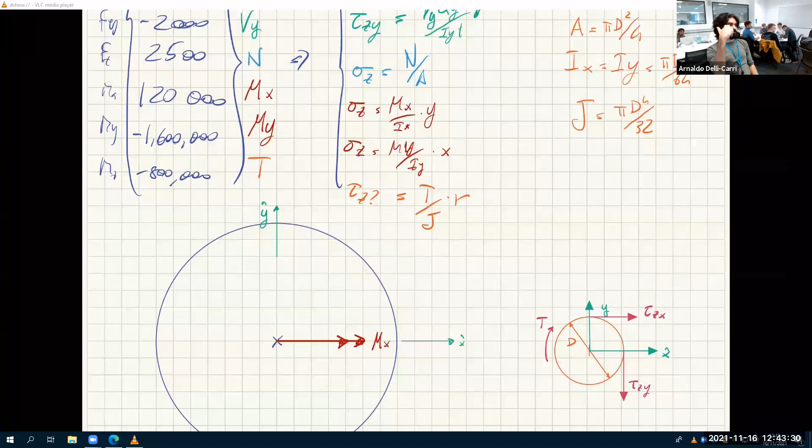So looking at the moments, it looks like we have 120,000 newton moment around x, which is this moment here. So let me take this here. So we have a moment of 120,000 newton millimeters. Are you familiar with the double arrow notation? You should remember. This is moment around this axis. This is Mx. This is the moment around x, meaning bending down in this case. My thumb is along these double arrows, and so this is bending down.

And it's much smaller, so let's make this smaller. This is much smaller than My. Say My is 10 times as long. It's very long, this one.

So it looks like one point - these points here, bending up and down, means that the most stress points are here and here. For this one, the most stress points are here and here.

But you should agree with me that around these points, where you switch from one moment to the other, there is a critical point that feels both effects summing each other out. So let's have an example.

The example is, if this is bending up and down, I have tension here, and tension here, and compression everywhere here. Agree? For the other one, which is this one here, I have tension here and compression here. So as you can see, the stress here sums up, and here as well.

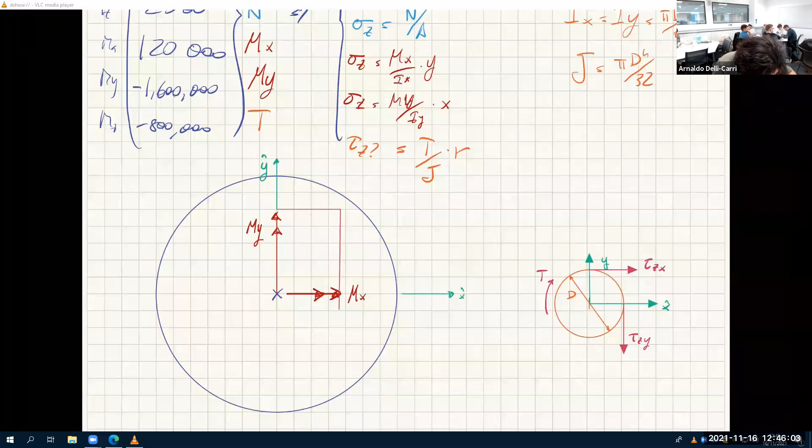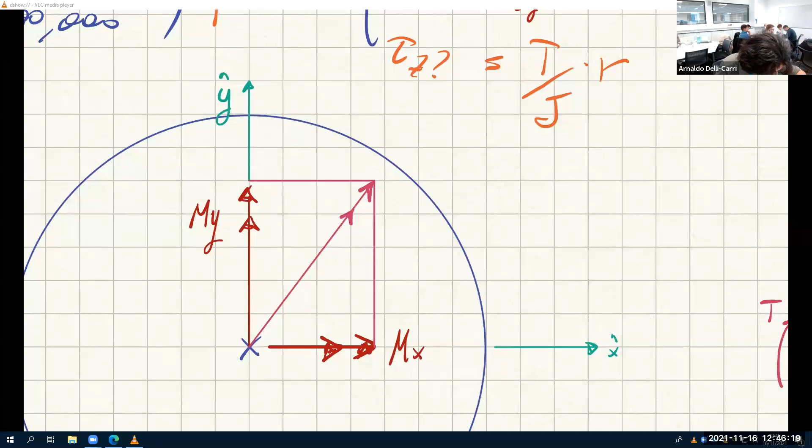This moment here, which is the bending moment, means that this thing is bending at the same time along X and along Y. So it's bending around the diagonal axis. Agreed? That also means that the neutral axis is rotated.

And so this is the neutral axis. This is the neutral axis. And that means that perpendicular to the neutral axis, you have the largest stress.

This one and this one. Point A, point B. This is the most tensile stress, and this is the most compressive stress. Agreed? Well, I didn't take into account the fact that My is negative, so I have to redraw everything here.

Why didn't you tell me earlier? I mean, I said sorry like 2 times and they didn't stop. So... because you should not be sorry.

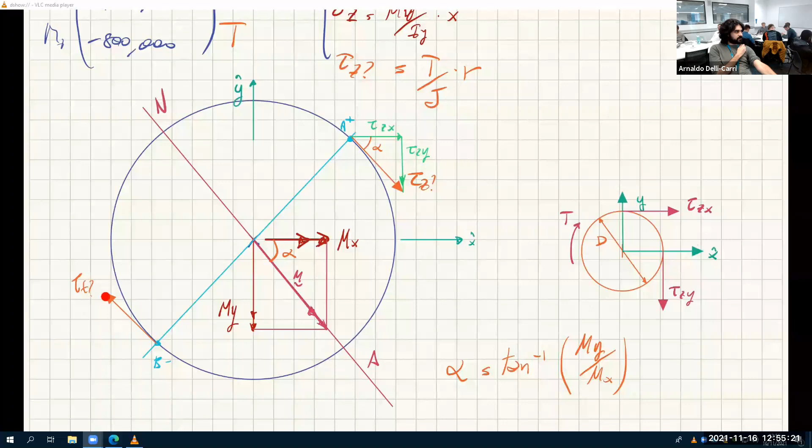And then you put them on the infinitesimal. So which infinitesimal are you calculating now? Let's say we are taking the infinitesimal at A, and let's take the infinitesimal as a cube, because A, let's say we are looking at it like z-axis, x-axis, y-axis.

And so you have sigma z from the axial load. So sigma z, which is positive—no, it's negative—no, it's positive. Then you have sigma z from the bending, which is also positive on A, because it's tensile. You also have on the back, you have this and this.

And then let's look at the stresses, the shear stress. You have tau zx and tau zy. Tau zx is this on this face, and so it looks like this. And tau zy looks like this.

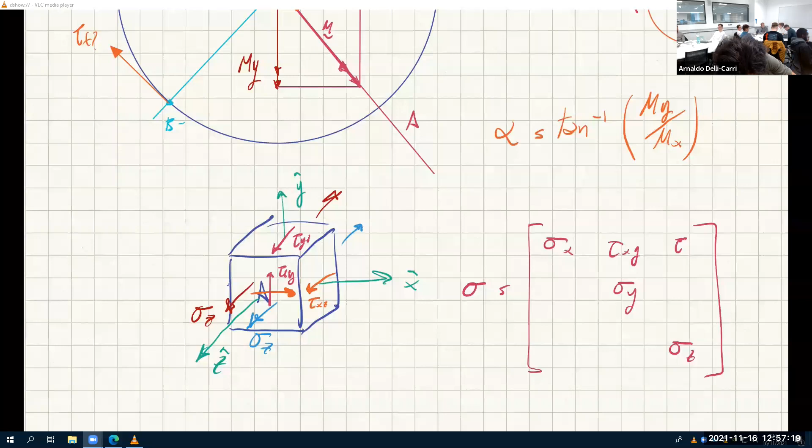So as you can see, you can't use a square in this case, because this is not a 2D state of stress. If you look at the stress tensor here, which is just a collection of sigma x, sigma y, sigma z, tau xy, tau xz, tau yz, tau yx, tau zx, tau zy.

So a 2D stress tensor has one row and one column that are completely zero, at least one, well, one, because from 3D you become 2D. Now this is non-zero. This is non-zero.

Tau zy and tau xz are non-zero. So sorry, tau xz and, yes, all of these are non-zero. So all of these are non-zero. Sigma x is 0, sigma y is 0. Oh yes, can you look at this? No, you can't. You need all three. See? You need all three rows and columns. There is no column or no row that is completely zero.

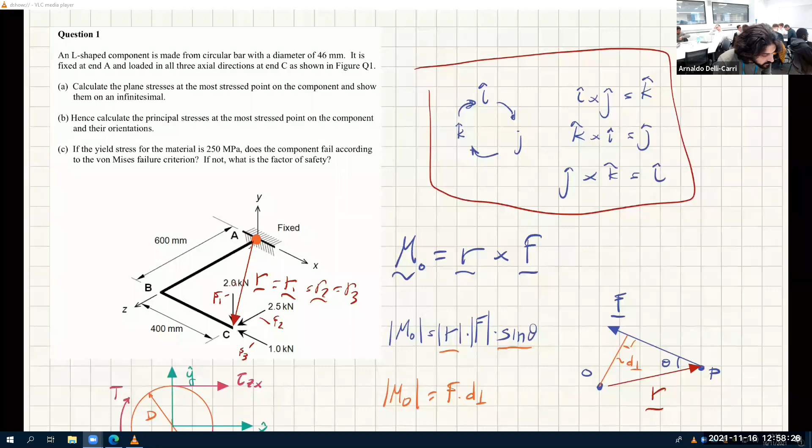So this means this is a 3D stress state, and you can't deal with this unless it says something in particular. What does it say? So unless you want to take new axes, possibly, that's the idea.

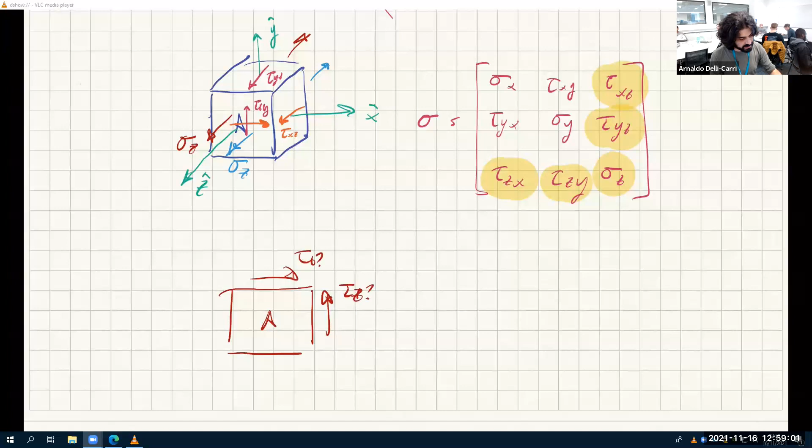So if you treat this as tau z new direction, and you put this and split this into a certain direction, you can say that you have something like this. On A, you have tau z whatever, tau z whatever. Then you have x in this direction. Sigma z, sigma z, and this, and this.

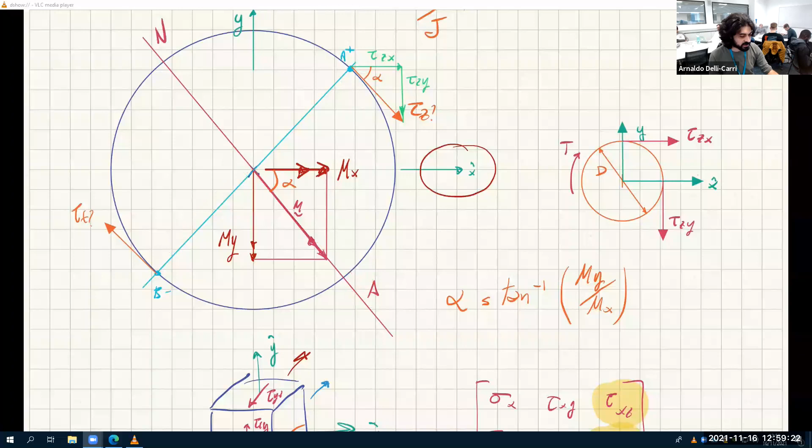Okay? You're just changing your plane, saying that your new x and y axes are aligned with these. This is x, this is y, say. So in that case, everything checks out for you. So you can still treat this as a 2D stress state, but you have to change reference frame.

Does this make sense? Now you do exactly the same thing that you did for the Mohr's circle, for Mises, Tresca, safety factor—those things should be very easy.

I'd say that's it, but let's just have a look at this. This is just Macaulay's method, which is what we did last week. So it's just a new one, which is even easier because it's a determinate beam. So it's not even one of the hardest ones. Make sure you revise all these things.